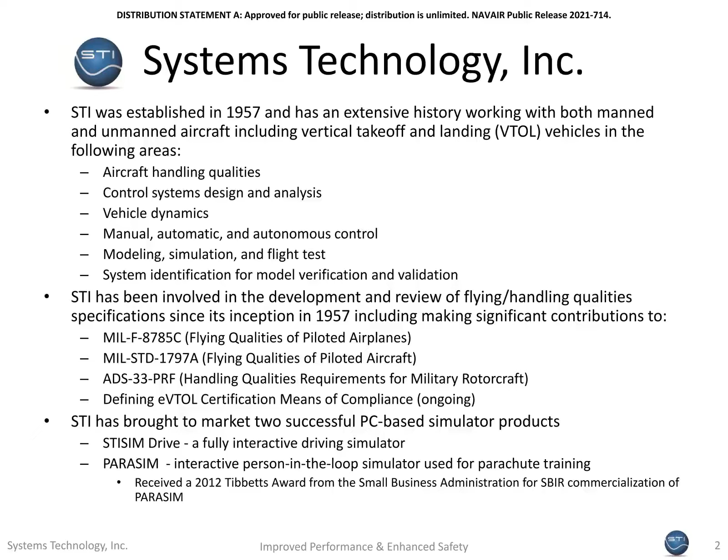Assessing the handling qualities of UAS has presented a unique challenge. Traditional methodologies relied on pilot commentary and application of the Cooper-Harper rating scale to make and drive these assessments. These were based on the precision and effort of the pilot performing a given task. But what is to be done when the pilot may not be directly in control of the vehicle, piloting it like a traditional aircraft, or when the system is autonomous and there's no pilot involved?

The core of the work performed here for the Navy is meant to address those questions. This work and prior NASA efforts in this space have helped us identify a mission-oriented approach as a solution, guiding applicants and regulators through the assessment process and to relevant handling qualities requirements. These requirements and the performance of the vehicle relative to the same is what would inform the overall assessment of the UAS and provide additional input to the decision makers as to whether to integrate a given vehicle into a test or operations environment. We expect our initial transition targets to be the MQ-25 and MQ-8B and C platforms, among others.

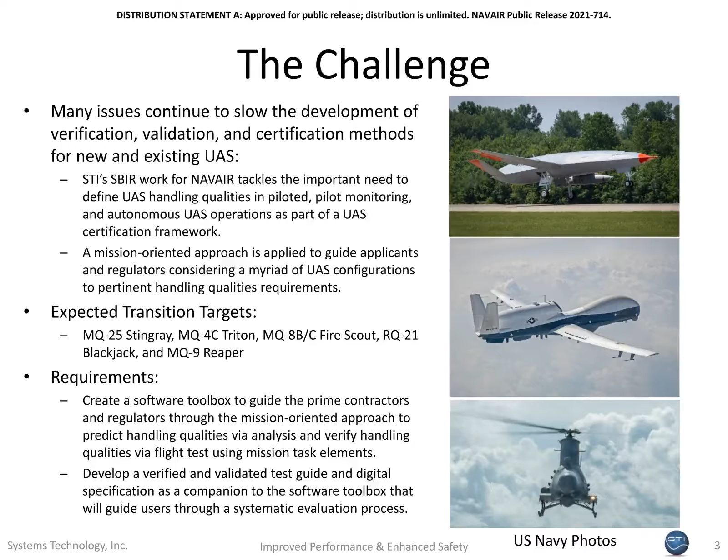And we are currently crafting a software toolbox to guide relevant parties through the mission-oriented approach to predict handling qualities via simulation and analysis, followed by the verification of those handling qualities predictions through flight tests leveraging mission task elements and the mission-oriented approach.

The need for such a process and toolbox was born from the reality that the current certification and acceptance processes for current and new UAS to enter the naval airspace and operations are not well defined. These assessments have been based on past experience, lessons learned, and adaptations of existing manned vehicle requirements and techniques. Nothing has been formally codified to address and fully assess the validity of these approaches and ensure that there is coverage of potentially unique UAS assessment needs.

The Navy has asked for a toolset and specification that would provide them clear guidance to perform the necessary evaluations of these vehicles and make a more informed and focused decision. Our current end users are NAVAIR and the broader Department of Defense; we would expect this process and tool set to also eventually integrate with the manufacturers and designers as the Navy is looking to apply this process to the assessment of their vehicles.

What will be required here to see it successful, at its core, is additional data, input, and financial support to fully realize a specification and requirement set that has validity and eventually begins to cover things such as failure modes and degraded conditions. The piloted specifications, MIL-STD-1797 and ADS-33, have evolved over decades and through multiple flight test programs across a range of vehicles. This database does not exist today for UAS, and some version of this will be required to develop a truly informed specification.

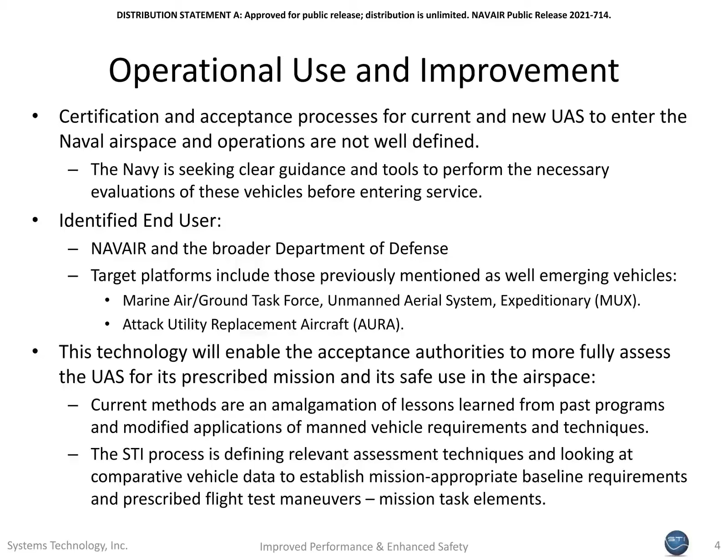This work for the Navy is focused on creating a digital UAS specification and test guide. In addition, we are creating a companion software toolbox to guide the end user through the handling qualities prediction and verification process. As mentioned previously, a big need for this effort is an appropriate test database to inform the various requirements. While piloted aircraft requirements can be a starting place in some instances, they do not and should not define the final requirements, or at least they should not, without having been checked against UAS-specific vehicles.

Our current specification effort will be informed by the X-47B test campaign and existing MQ-8B and C databases. Our partner, Penn State University, will be gathering additional rotorcraft data, but these databases represent one to two examples of two types of vehicle only. Further information across a range of test conditions, vehicle types, configurations, and scenarios will be required to truly validate the preliminary bounds that will be set here.

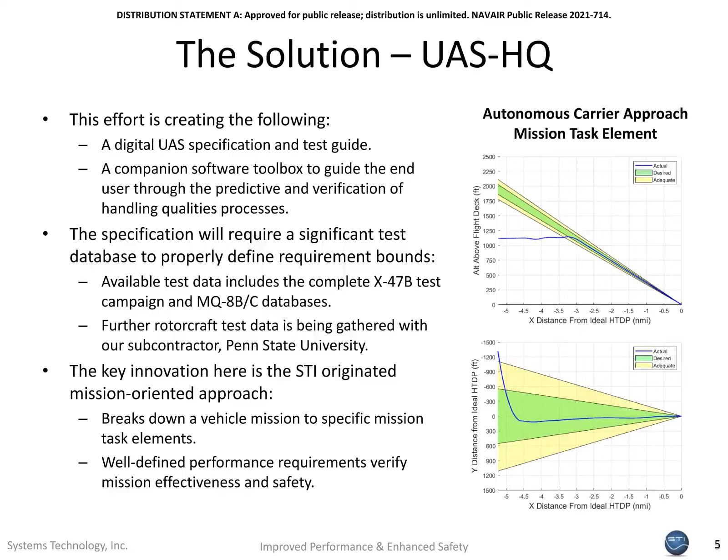The key enabler of this work and what will permit its broader application is the STI-originated mission-oriented approach. This methodology breaks down a vehicle mission to specific mission task elements with well-defined performance requirements that are meant to verify mission effectiveness and safety. For example, as a part of the usual mission of a rotorcraft, it will be expected to hover. A hover task would then be defined as a mission task element, and a specific maneuver and associated requirements defined to formally assess the vehicle performance.

The current status of this effort is as follows. We have developed a draft UAS handling quality specification that is being tailored to Navy applications. In support of that work, we've also drafted representative mission task elements for their different mission scenarios and performed an initial survey of the MQ-8B and C and X-47B datasets. Those datasets have been assessed both to develop those mission task elements and also explore the data available that could be applied to candidate requirements boundaries.

The rotorcraft flight test program at Penn State University is also underway, and an alpha version of the UAS HQ software toolbox has been developed. The toolbox will be updated as the data is assessed, and relevant mission task element requirements and requirement boundaries can be established or updated. This work originally began as a NASA Phase 1 SBIR, then Phase 2 program, before being picked up by NAVAIR as a direct to Phase 2 program to consider more Navy-relevant applications. The option to the Navy program is ongoing now and will result in a test guide and companion software toolset for integration into the NAVAIR UAS assessment process.

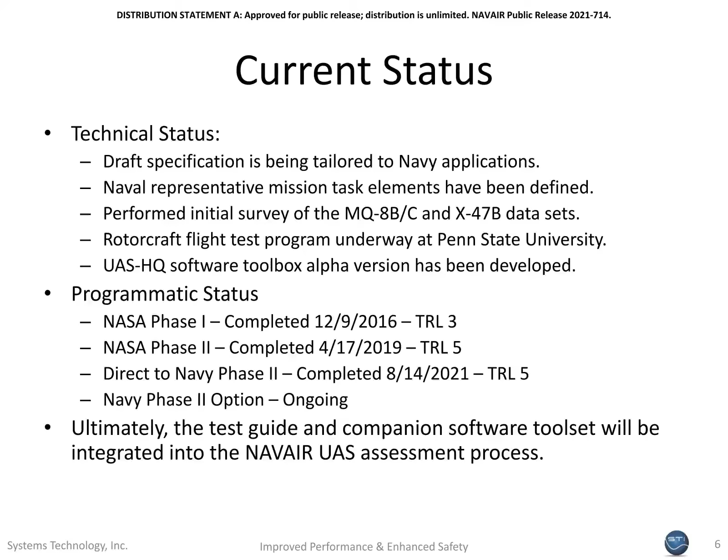A key advantage that this work provides is a set of candidate requirements and boundaries that are specific to UAS for a given vehicle mission and that are not simply adaptations of the existing manned system requirements. Any application of those requirements will have been made with adjustments based upon available UAS data and not as a blind use of the existing values. In addition, as UAS are by definition unmanned, their requirements will be independent of any pilot comfort or other control methodology assumptions that are present for the existing piloted vehicle requirements.

These insights will be summarized in a central UAS-specific handling quality specification and test guide with supported mission-based test and evaluation approaches. This has the benefit of supporting a formalized process for fleet integration that will increase the speed of this activity while decreasing the 3 core issues in cost, schedule, and technical risk. The software that goes along with this will facilitate the application of the specification, providing a common framework for all assessors to work through within and throughout the design process.

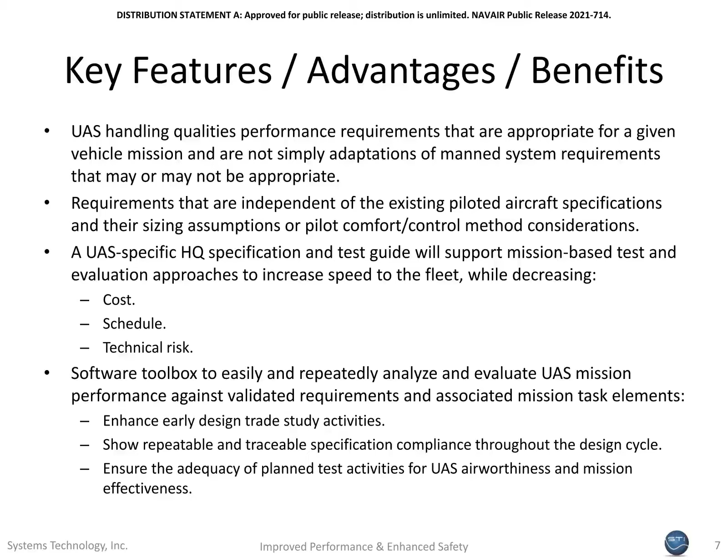As discussed previously, the UAS handling quality assessment process described here considers both the predicted and flight verified handling qualities of a vehicle. This toolbox facilitates the repeatable and traceable specification compliance throughout the development process and then informs the test activity planning through these analytical assessments.

In order to support a complete specification and test guide, we are asking both the Navy and the UAS community at large for additional data and funding support to continue and expand the developments described herein. Navy-relevant data should include and address different vehicle configurations and types, as well as cover a range of mission task elements. The data should also cover a range of pilot-operator involvement and autonomy level in the operations of the vehicle, and if possible, failure modes and envelope protection schemes. All of these and more will be required to be understood to develop a full picture of UAS handling qualities and associated considerations. Both the specification and toolbox will benefit from these data sets and further the effort.

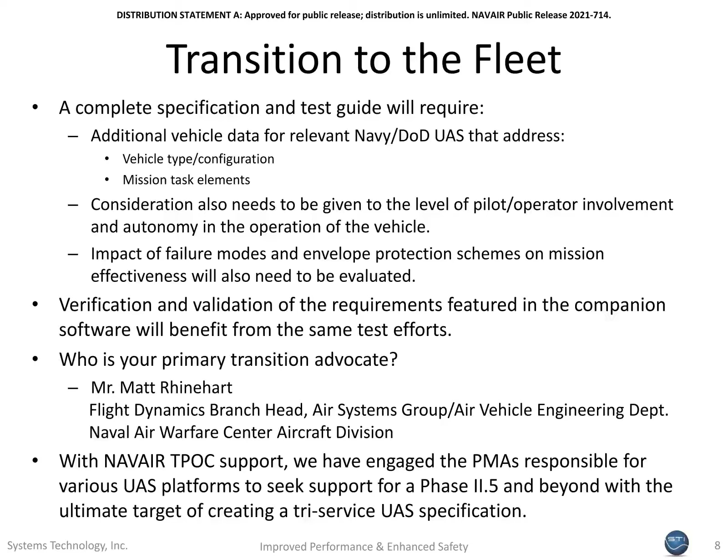Mr. Matt Rhinehart, the Flight Dynamics Branch Head, Air Systems Group, Air Vehicle Engineering Department at the Naval Air Warfare Center Aircraft Division, has been our primary transition advocate and has identified the need for the specification and toolbox. With his support, we have engaged PMAs responsible for the various UAS platforms to seek their financial support for a Phase 2.5 and beyond program, with the ultimate goal of creating a tri-service UAS specification.

The specification, test guide, and companion software form the core of a new productized service where we provide the customer the software toolbox and test guide, and then work with that customer to support their test and assessment efforts. This support will include things such as test plan development, execution, data reduction, and analysis, in addition to any other GNC-related activities and needs that we here at STI already provide.

The transition and introduction of this new productized service will be enabled through the adoption of the specification, test guide, and toolbox by naval procurement and science and technology authorities at the PMAs, in addition to prime military UAS contractors. As mentioned previously, additional funding and support through test data and other related activities will be required to properly define and validate the requirement bounds and software that form the core of this new service.